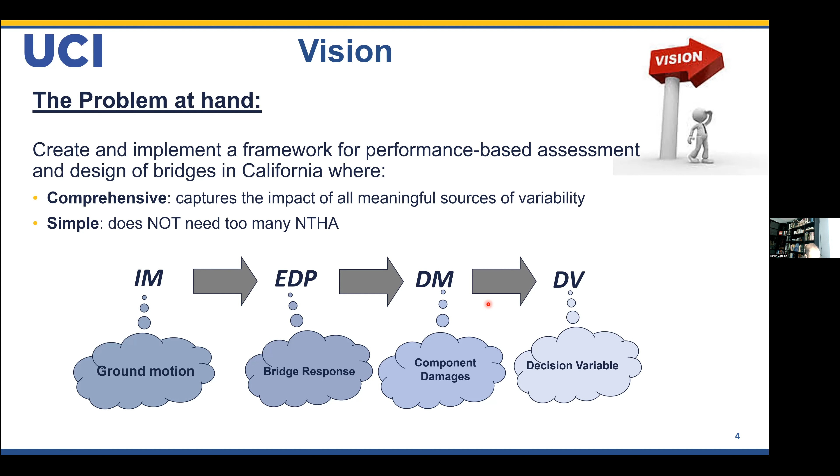And again, I didn't see the PEER integral today and the sequence of the variables from IM to EDP to DM to DV, so I thought it would be nice to show them here for you. Now, folks at Caltrans have come up with a process. It's called Probabilistic Damage Control Application. And this is the title of their paper in ASCE Structures, in which they have codified some sort of way for designing bridge columns.

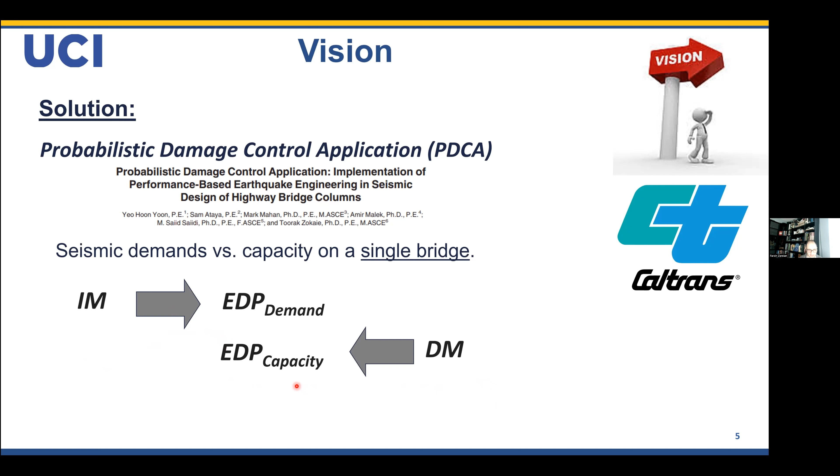From the ground motion and loading side, you have the EDP demand. From the damage and decision variable side, you back calculate what is your EDP capacity. Like the old engineering way, demand should always be less than capacity, with some probability, let's say, and you have a good design. Now, the EDP that these folks are considering is something called a damage index, and this picture that you see here is a pushover of a bridge column.

Delta Y is the yield point. Delta UC is the ultimate point. The demand that is going to come out of your nonlinear time history analysis or your simplified way of doing the analysis is delta D. Delta D minus delta Y on the numerator divided by delta UC minus delta Y, which is the capacity, is called the damage index.

As you can see, with this variable DI, if the loading from the earthquake is small, like a 50-year return period ground motion, hopefully you're not reaching yield, so the numerator will be negative. Now on the flip side, if this demand goes beyond delta UC, it is our convention to say delta UC is the end of the life of the column. But unfortunately, bridges and natural beings don't follow what engineers think they will do. So life continues after delta UC, and DI can easily be more than 1.

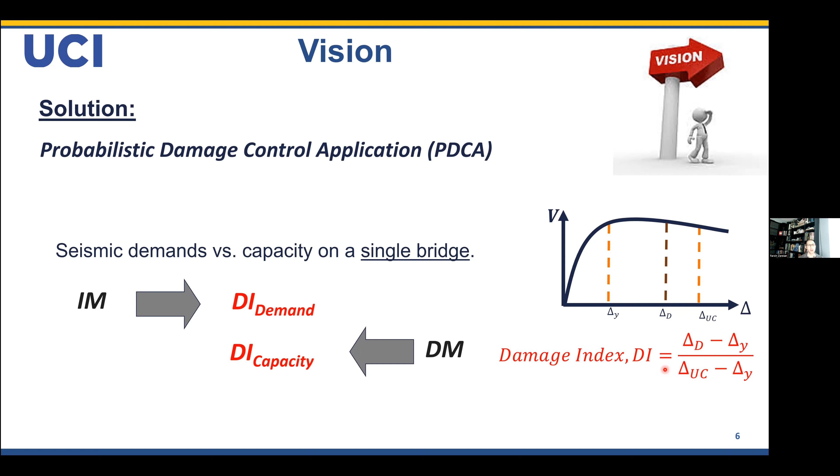But as far as the PDCA work is concerned, DI is constrained between 0 and 1. Anything below 0 is scaled up to be 0, and any DI more than 1 is scaled down to 1. We are doing a lot of massaging of the data, which I'm not showing for the sake of brevity and time, and I don't want to confuse folks on this. But for today's presentation, DI is lognormally distributed, but is between 0 and 1. And that has some impact on the results that I'm going to show, which I'm going to walk you through so you can see where we're going.

Now, again, continuing with the PDCA approach, it is a reliability, probabilistic based approach. So you want to calculate this beta I, which is the closed form solution of a reliability integral. You're integrating the probability of demand being more than capacity, conditioned on capacity, over all capacity. And then from there, you get a beta.

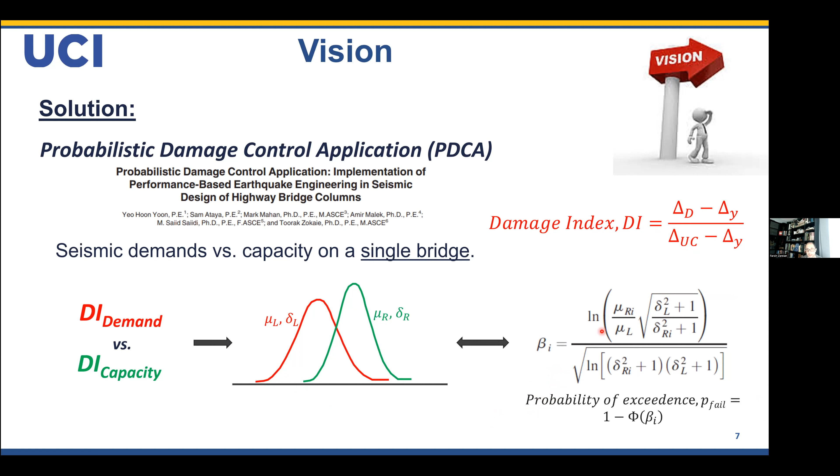And then from knowing the beta, you can back calculate what is the probability of failure. Our task is to provide information for engineers that they can do this. So moving forward, let me walk you through the process, and then I'm going to come in and say where our work is important. So the designer comes up with the column properties, size, based on what is needed, and then the experience and everything.

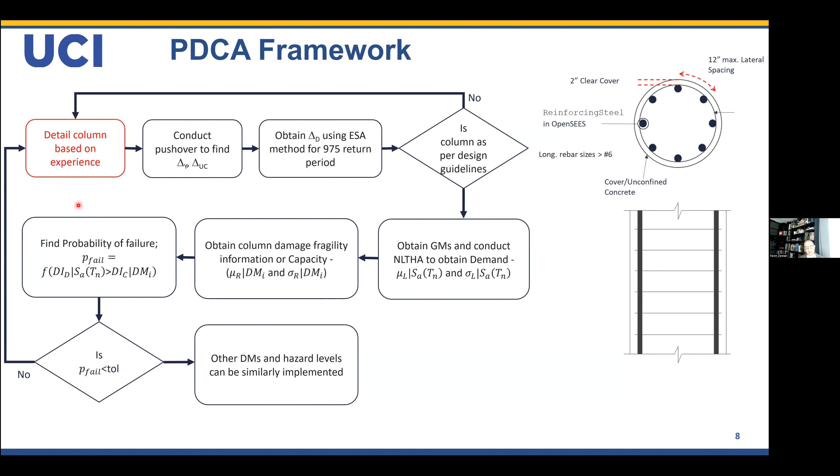And they conduct a simple pushover to find out what is the yield point, ultimate point, and they use, again, simple solution like the ESA, the equivalent static analysis method from SDC, even in SDC2 is there, and come up with a column. The important thing here is that once you calculate the DI for the envisioned column, it has to fall on the 0.35 damage index.

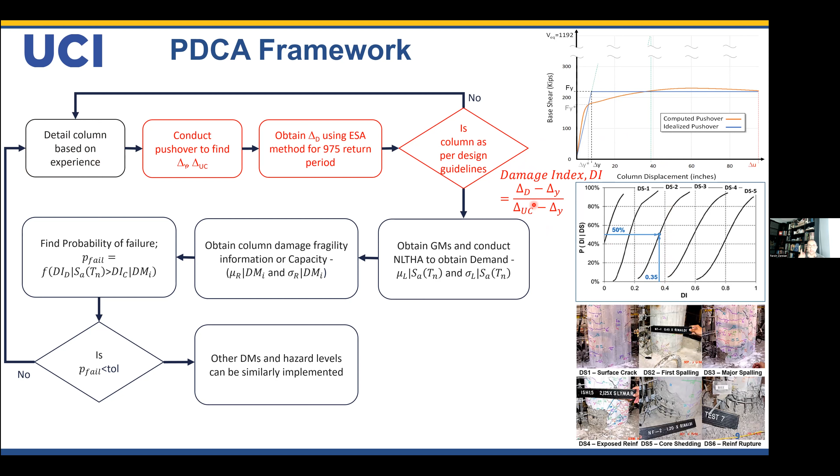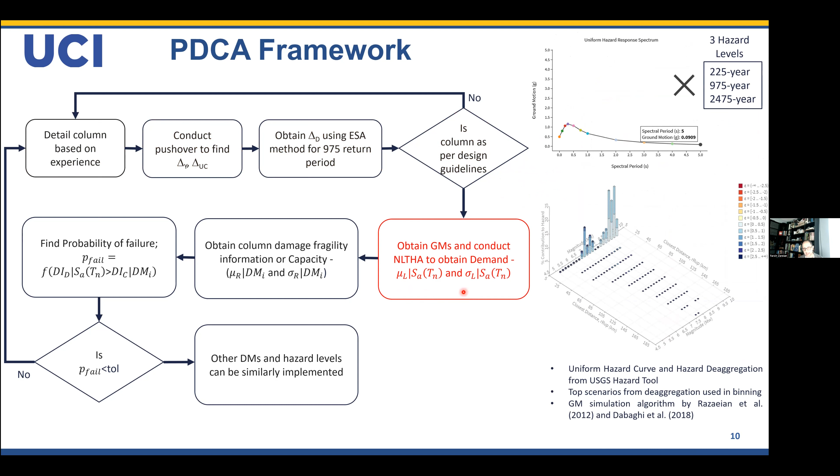Once you have the column, PDCA team is suggesting that a ground motion simulation happens. Ground motions are scaled, which I'm going to discuss later on in my presentation today. And you get statistics of demand, mean of demand, and dispersion of demand. Obviously, conditional on the SA, which represents the hazard. Continuing with the damage fragility curves that were obtained from lab work, and our work is heavily relying on the work of Saini and Saiidi from UNR and UCLA.

And by putting the information sigma R, mu R, and mu L and sigma L into this beta equation, you find what is the beta value for each hazard level. And then by integrating over the hazard level, you can come up with statistics like what is the probability of exceeding damage state 3 in 75 years? Or what is the probability of exceeding damage state 3 in a 225 hazard level? That kind of statistics can be made. And then if it's satisfactory or unsatisfactory, a bridge will be redesigned or is good to go.

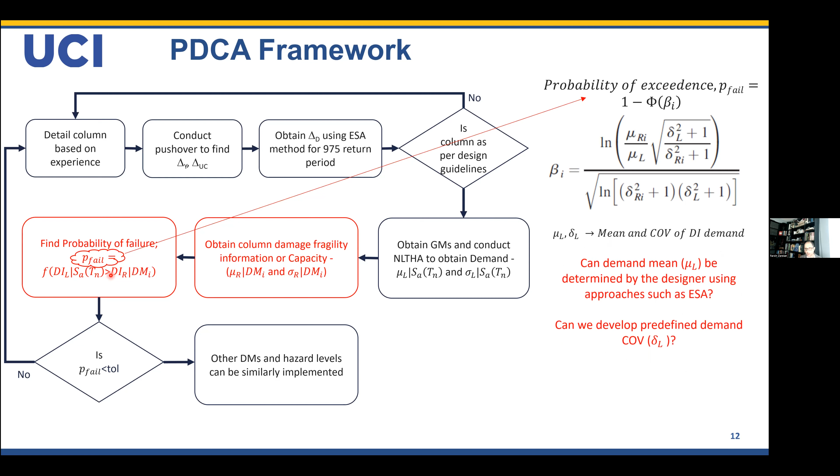And we're going to go for the detailed design. Now, two questions come up and we have the solution. Can demand mean value, which needs to come from nonlinear time history analysis, be determined by the designer using the equivalent static analysis and the fudge factor that we will provide, which is here. And we're going to provide a map of that for California. And then we will give canned values of the coefficient of variation across California for DI.

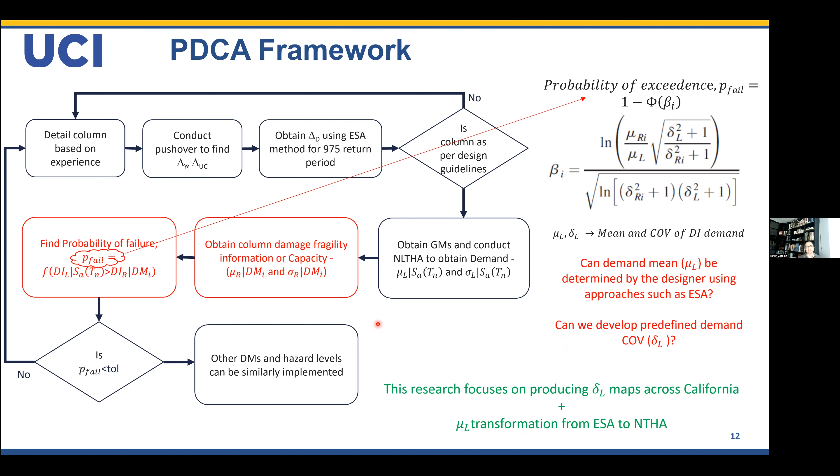This will help the designers not to do too many nonlinear time history analyses and only rely on a small number, which is enough to find the mean, or even if they want to use the SDC ESA approach, they use our fudge factor to come up with the mean. This is the realm of work that we are doing for this project.

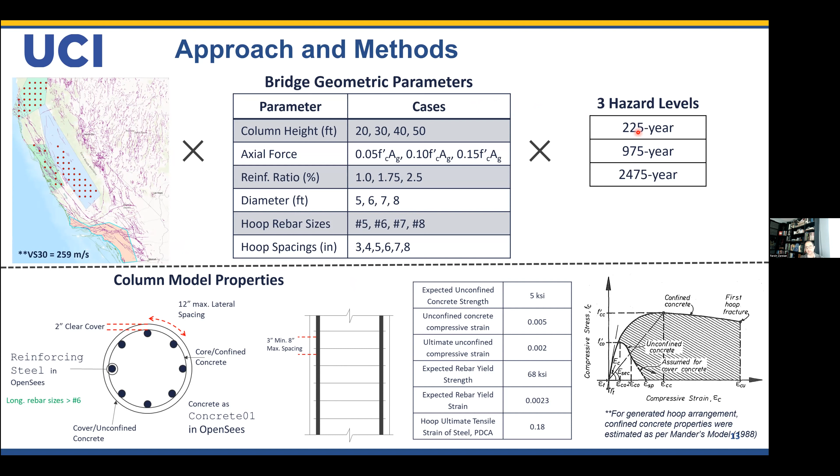All combinations are considered. These columns will be evaluated for having a damage state of 0.2 to 0.4. Any column from this that has a damage state of 0.2 to 0.4 in a dot will be considered on that dot for analysis. And we're going to evaluate these columns for 3 hazard levels, 225, 975, and 2475 level hazard. So I repeat what I just said, but now I'm going to slice and dice things in a way that later on you'll see what I mean.

For the design of these columns, we're considering damage indices between 0.2 and 0.4. I did mention earlier that the design should be done for 0.35, but we know that a single number is never achievable by an engineer. They might have a design that ends up with a damage index of 0.38. So our work should be comprehensive enough that it covers larger than 0.35 and significantly lower than 0.35, where you can enter the zone of over-designed bridges or recovery bridges that actually have a damage index much lower than the ordinary standard bridges.

67 locations so far is the number of dots that I just showed you. We are showing the results for VS30 of 259 in all of those dots. We are repeating the work for 537. We are doing range scaling, so we are simulating ground motions and scaling them up to the target spectrum with range scaling. We're looking at 3 hazard levels. Designs, 51 ground motions per hazard, ends up with 3.1 million analyses, which is 2.5 years of work.

If you run it on the PC. We're using our high performance computing at Irvine, which gets this thing done in about 2-3 months. We don't have access to what Scott and other folks have at this mega giga Google level of supercomputers, but we manage.

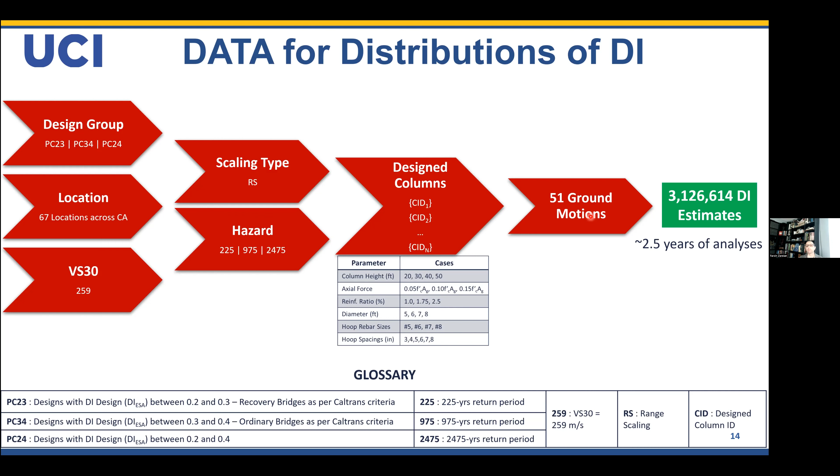So I'm going to stop that work. Norm said, I don't believe in the way that you guys are doing your ground motion simulation and then scaling them up. So you need to show me if the work is valid.

So what we did is we used something called, in literature, conditional ground motion model. A ground motion model, GMM, is event parameters go in, intensity measure comes out from the other side. A conditional ground motion model is not only that the event parameter goes in, another primary intensity measure also goes into the information side of the equation, to give you information about another intensity measure.

And these other intensity measures that I'm talking about, we call them secondary intensity measures, are Arias intensity and cumulative absolute velocity, PGV, duration parameters, and all. So what we have done is that, I forgot to mention this, that we are using Armen Der Kiureghian and co-workers' work for simulating ground motions.

So we go to each one of the dots, we use USGS to aggregate and deaggregate the hazard. We find the main events and their contributions. The events go into a ground motion simulation model, which is stochastic, and generates a motion. This motion definitely doesn't match the target spectrum. So we scale it up to reach the target spectrum. The intention is to find out if this work is valid.

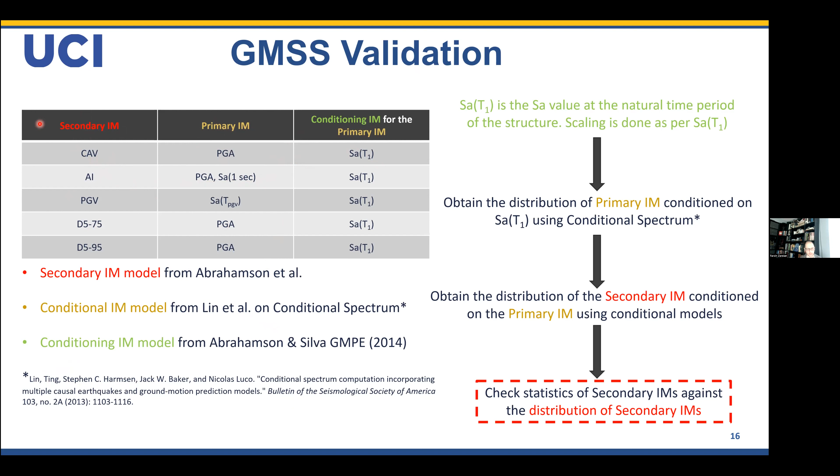Now, the way that we do the hypothesis testing is that we check for distribution of the parameter, test of the mean of the parameter, and test of the variance of the parameter. The intention is to make sure that what comes out of simulation and scaling gives the same statistics that come from the conditional ground motion model. And if the 3 tests check, it is valid.

Otherwise, we go and check if the response is sensitive to the secondary parameter. If it's not sensitive, ignore it. Although I don't have the ignore arrow here, imagine that you can ignore that parameter. Otherwise, you have to do a sensitivity analysis and see if the IM that you are generating and is mismatching at least covers the 5 to 95% of the range that the conditional model is suggesting. And the only one that didn't fit in this ballgame was PGV.

So we have considered the following remedy. All the ground motions that we simulate and scale will have a PGV that falls in the 25 to 75% confidence interval of the mean. And the band is between 5% and 95% total. There is no simulated and scaled ground motion with a PGV that is less than 5% or more than 95% of what the conditional ground motion model suggested.

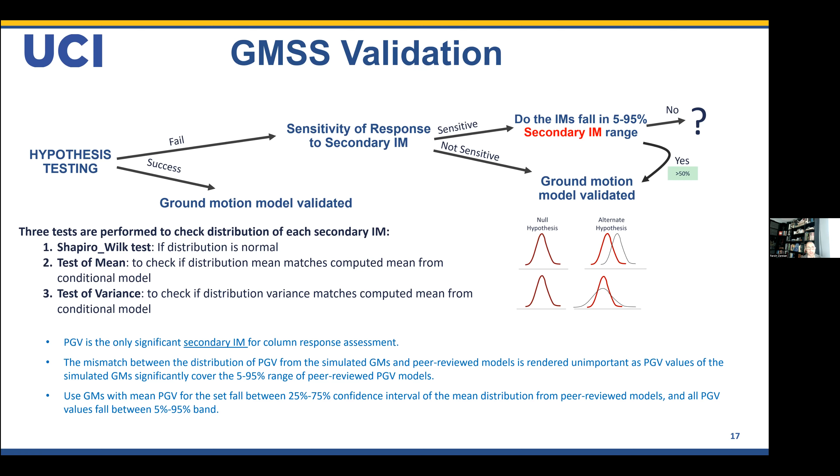Once you assume a lognormal distribution, but your numbers are very small, the coefficient of variation goes to huge numbers that are relatively meaningless. So you should stop looking at coefficient of variation and look into probability of failure, which I have in a couple of slides at the end of this presentation.

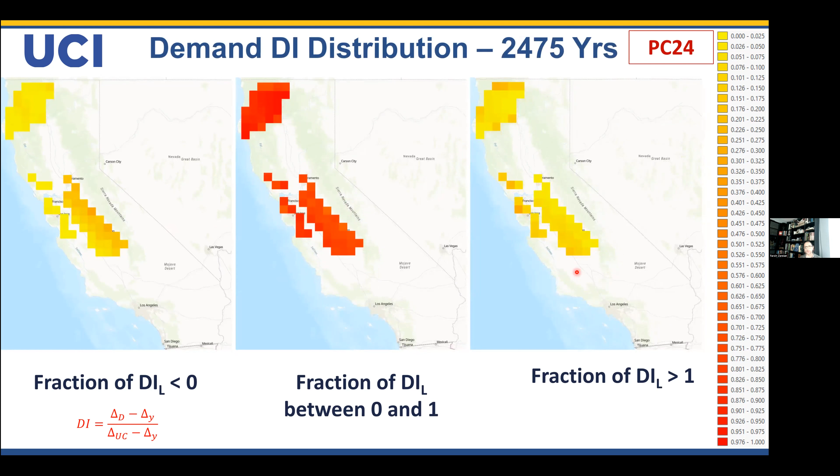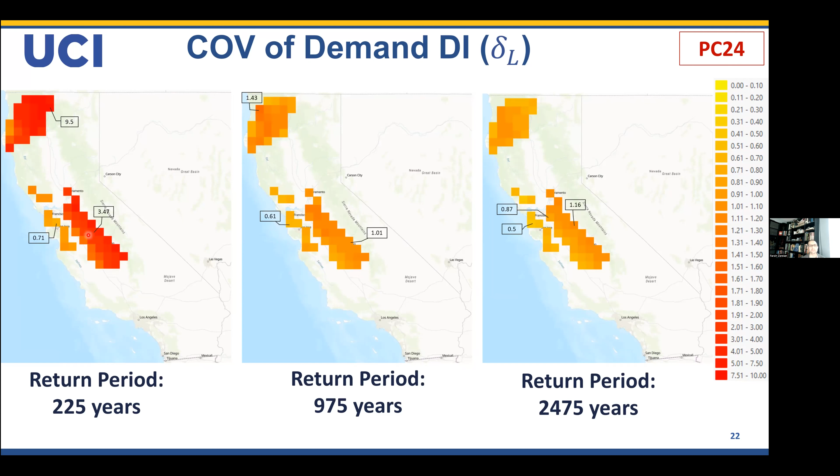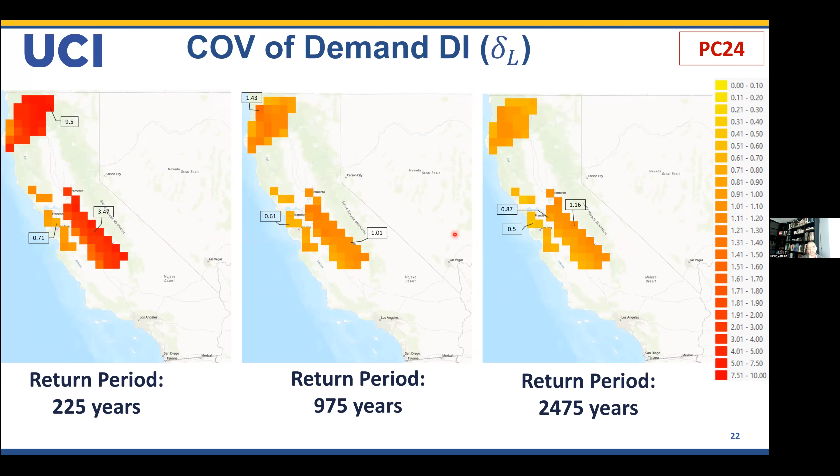Let's talk about the coefficient of variation. As I mentioned, because of that assumption of log normal, 9.5 for 225-year return period, 3.43. These are very fictitious numbers. Please don't look at these, but we were just reporting to be fair with the approach that we had. The numbers that are more meaningful to look at are for 975 and 2475, somewhere between 0.4, 0.5, 0.6, which is meaningful.

Now, we have also sliced and diced this data for coefficient of variation based on the bridge design criteria. The previous slide was for designs all between 0.2 and 0.4. If we slice the data for designs between 0.2 and 0.3, call them over-design bridges, and 0.3 to 0.4, let's say edge design bridges, we can see that this coefficient of variation becomes smaller up here, which again is due to scaling up all the numbers from lower than 0 to 0, and more variability happens because of that action.

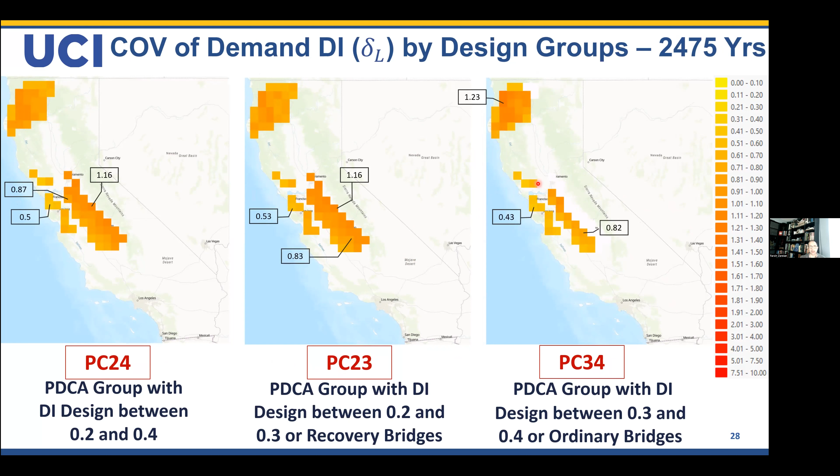For 2475, again, same idea. I put the slide here for folks who want to watch the videos later on. They can make a comparison. Two more slides, and then I have the conclusions.

This slide is the probability of exceeding damage state 3, which is major spalling. This is the fragility curve for it. We have done the probability of demand exceeding capacity for 225, 975, and 2475. And obviously, as the ground motion return period is growing, the reds are becoming more. By the way, please note that the scales are not similar. Because we wanted to show some heat in each one of these plots, we had to use different scale factors.

But again, you see that the maximum here is like 5%, the maximum here is 60%, and maximum here is 90%. In all cases, Bay Area looks worse than the Central Valley. And hopefully when the results of Los Angeles and San Diego come up, we can compete with the folks in the Bay Area.

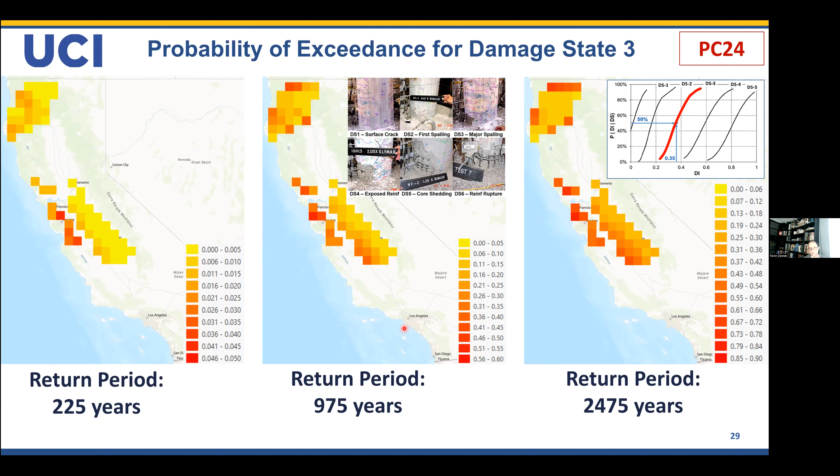Integrating the results for each one of the return periods over the hazard curve, we get the mean annual frequency of damage state 3, which if you put it in a Poisson process and find the probability of exceedance for 75 years, this is what you get. Now, these are comparable. You can see that for bridges that are designed to the edge, the chance of exceeding damage state 3 in 75 years becomes close to 10%.

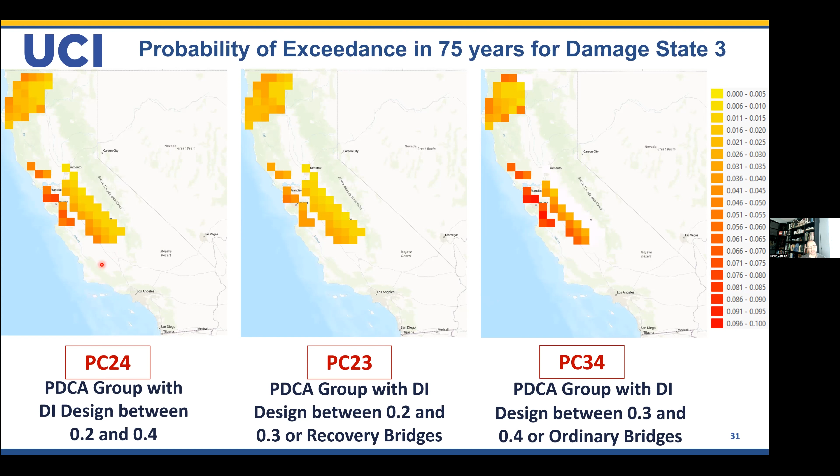This is the last slide, and the drive home message for you is that for an edge design bridge, a bridge designed to the limits of the PDCA approach, you're going to end up having 10% probability of exceeding damage state 3 in 75 years. If you over design, the numbers reach around 5%. And looking at all the data together, the picture on the left-hand side shows that.

We're not going to stop here. We're going to continue the work until we have the delta L and all the factors for the entire state of California. We're also going to go deeper in areas where we see a lot of variability, and do some micro zonation, if I can use the word here. We're going to take the work to another level, and we're going to throw bridges in there.

We have had 3-4 types of bridges in our arsenal since 2008. We're going to design the bridges for the location and assess the bridges for the location. And we're going to come up with examples for the engineers so they can use the work to their benefit.